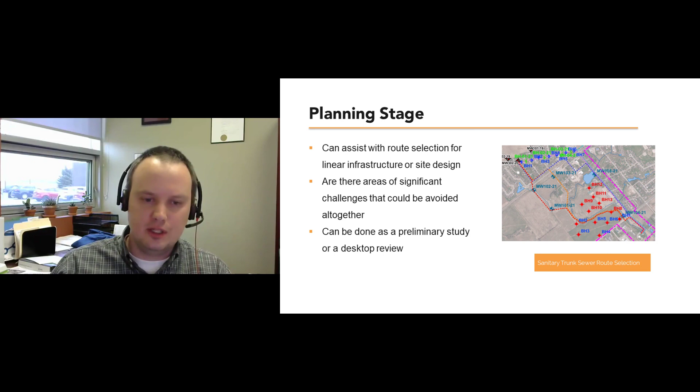Obviously, there's other factors at play with that in addition to the soils, but yeah. So these can be done kind of as a preliminary, something like that, where we're just doing a limited number of holes or just even a purely desktop review study.

During the design stage of a project, then typically we would be filling in the gaps from a preliminary study and really nailing down what all the conditions are on a site, whether there's unsuitable soils that need special design, whether you have groundwater, bedrock, whatever the case may be on the site.

So we're typically drilling boreholes at a set interval or set spacing for the project, whether it's a building or a road reconstruction or whatever the case may be, to get a good picture of the conditions.

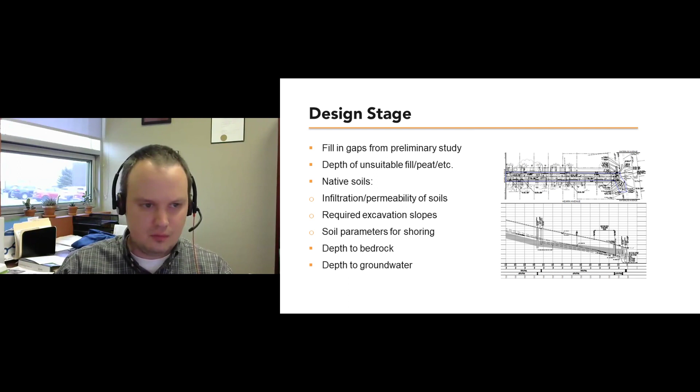And then at the construction stage of the project, really the contractors are looking at the geotechnical report to see what sort of equipment they need and what sort of production they can expect based on the soil conditions.

The type of soils on a site will have a big impact on the workability. If they're going to be impacted by weather, on kind of a silt and clay site, you may be shut down for 2-3 days every time you get a good rain, as opposed to a sand and gravel site where that water is just going to infiltrate away and you're going to be up and running as soon as the rain stops. So certainly has a big impact on that.

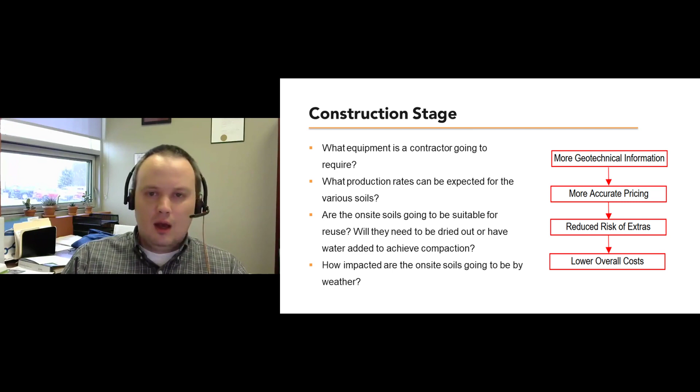And what are the key kind of elements in a typical report? Generally, most reports are structured fairly similarly, where you're going to have an introduction talking about the project, a discussion on kind of what was done for the investigation, and then a discussion on the soil, the groundwater, the bedrock, whatever the conditions that were found.

And then following that, you're going to have your recommendations on what needs to be done to have a successful project. So whether that's trenching recommendations or bearing capacity for buildings or bridges or structures or whatever the case may be, that's going to be kind of in that main discussion and recommendation section.

And then typically in the appendix, you'll have figures of the site plan, location plans, borehole logs, and any lab testing results that were completed as part of the project.

So moving on to borehole logs, every consultant uses a different kind of template borehole log. So they all look a little bit different. Some have color, some are black and white. The location of the information may be in different places, but the basics of a borehole log are generally going to be pretty consistent, the basic information that you can find.

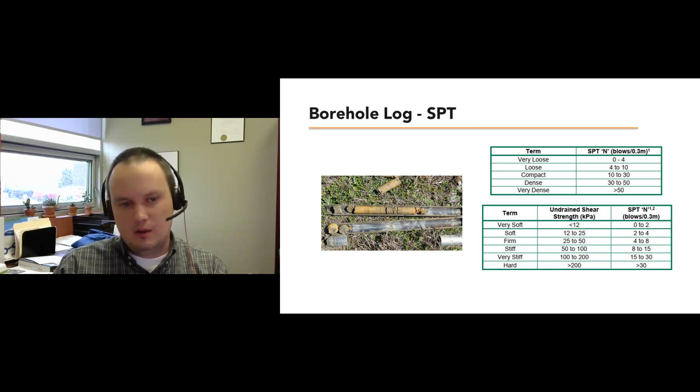So what the pocket penetrometer is, it's kind of a quicker small handheld probe that you just stick into the soil, and it gives an approximation of the shear strength. The field vane is a bit more intensive, so you push a 4-bladed device into the ground, and then you turn it to get the initial strength, and then you wait, and then you turn it again to get the remolded strength. That difference between the initial and the remolded gives us the sensitivity of the soils. A more sensitive clay is going to have a much wider spread between those two values, whereas something that is not that sensitive will have much closer values.

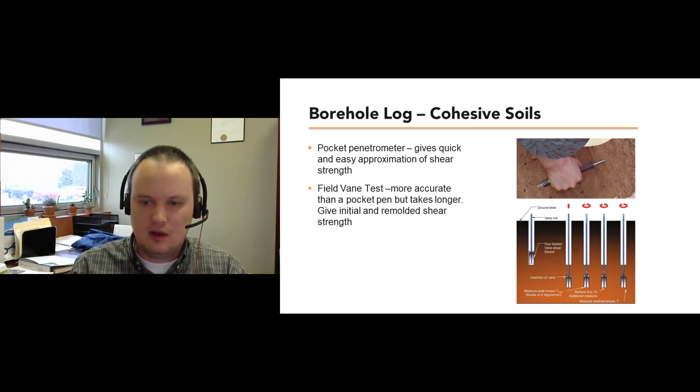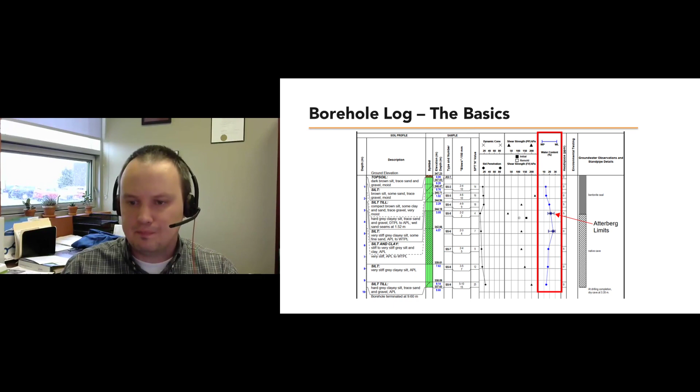So in this particular case where you have a water level 2 meters below ground surface in September, if you were going to start the project in April, odds are that water level is going to be a little bit higher at least. So definitely something to keep in mind, that just because your borehole log says your 2 meter deep excavation is not going to be in the water, that may not be the case at a different time of the year.

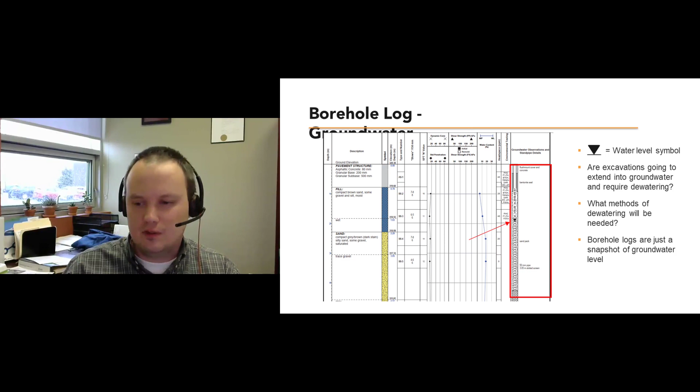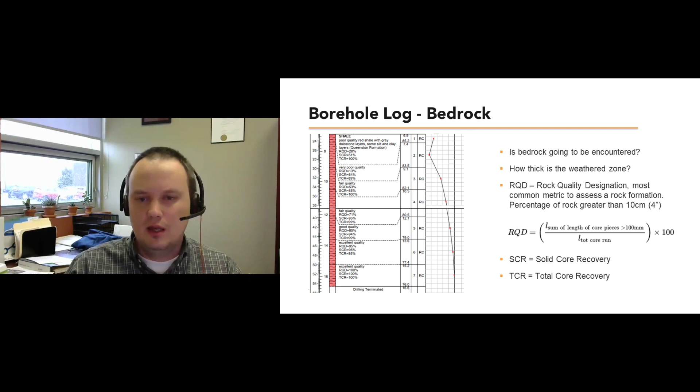So the next log I have here is a log showing some bedrock cores. So obviously bedrock is going to have a big impact on your constructability, if you're going to be dealing with that. So some big critical things to note on that is how thick your weathered zone is. On this particular log, you can see that the top, what I've shown in the box there, is poor to very poor quality bedrock, and below that is fair to good, excellent quality, progressively getting better quality as we go down.

As well, something to note in this one, the bedrock is described as red shale with gray dolostone layers. So those dolostone layers are going to be a lot harder within that shale. So the shale in this case may be something that is able to be broken up quite easily with a rock breaker on an excavator, but the dolostone layers may significantly slow them down depending on the frequency, the thickness and the hardness of those.

The values that are typically provided, the most common one is the rock quality designation, so your RQD, and that's what we use to base the very poor, fair, good, excellent quality rock. And so really it's just a good indication of what the strength of that rock is. It's the percentage of pieces that are greater than 4 inches long divided by the total length of the rock. So in this case, the one shown in the box, the RQD is 53. So just over half is coming up as bigger pieces.

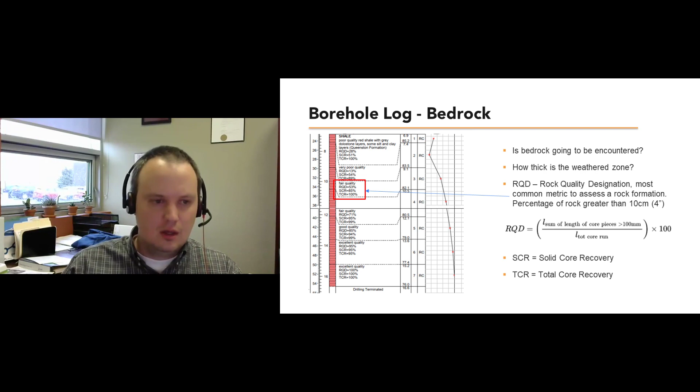But now, if you're installing a new manhole, you're not going to want to set that manhole right in that peat layer, because it's not going to provide support. You're going to have settlement after construction and a wonky manhole within a couple of years. So you're probably going to need to dig down deeper and replace it with some more granular bedding or something to deal with that peat.

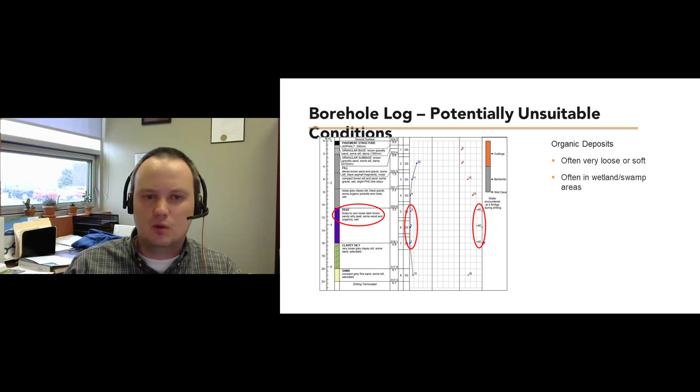As well, 2 more examples I have here. On the left was a project where we encountered an old landfill that the municipality wasn't aware was there. So you can see the column on the right of that log shows the N values. They're 3, 2, 2, 3, 6. And the descriptions of some of the material there: clay, plastic, metal, glass, wood, brick. Again, something that's not going to be suitable to support really much of anything without movement after construction.

On the right side, that is a log that was taken right on the lakefront of Lake Ontario. So back in the day, loose lake fill to get more land on the waterfront, using whatever they could find, slag, brick fragments, and obviously that material would have been placed underwater with very little compaction and isn't going to be suitable to support really much of anything. The N values there are 7, 5, 2, 2, 0, 2. So very low strength, something that is going to need to be designed around.

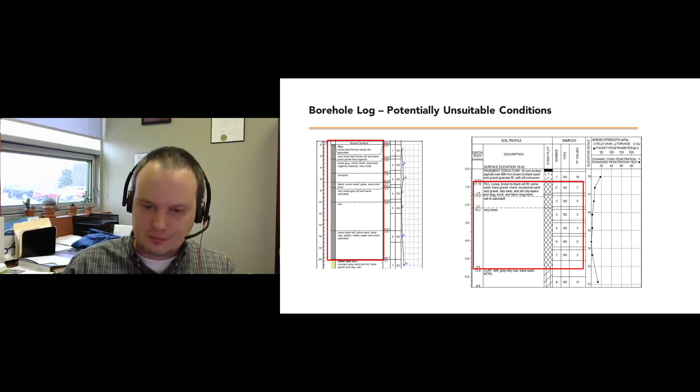So next, we'll talk about how to scope an investigation. The answer is it all depends on the project and what you need to do. A lot of that comes from what you're expecting the conditions to be and what the complexity of the project is. Are you going to have bedrock, high groundwater, or are you expecting crappy fill or peat or something like that? And as well, what is the variability of the natural geology in that area?

On the right, these are two pictures of surficial geology mapping. The two areas are only about 80 or 100 kilometers apart, but on the bottom, the surficial geology in the Niagara region is very consistent, generally a clay material, whereas the other one, in the Drumbo area, is very variable, where you may need a tighter frequency of borehole spacing to make sure you're not missing a pocket of sand and gravel that might be saturated and would cause significant problems with dewatering during construction.

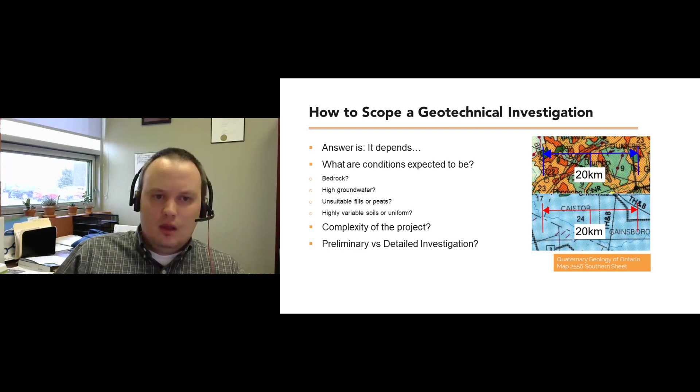So some key things to consider when asking for a proposal. What is the purpose of the investigation? Are you looking to get preliminary or detailed design? If it is detailed, you really need to provide your geotech engineer as much design information as you have, so they can make sure their boreholes are deep enough and their spacing is correct. And you really need a clear definition of the scope if you're getting multiple quotes so that you can compare apples to apples.

Recently, we had a project and the client came back and said we were twice the price of somebody else. Talking to them a bit further, the other consultant hadn't put in any monitoring wells. Well, I knew that the project was in a sand and gravel area, groundwater was very shallow, and we had a 6-meter deep sewer that was going to need significant dewatering. So without monitoring wells, it wasn't going to be a sufficient program.

Some other considerations to take into account. One thing right now in Ontario, at least, is excess soils. We have a new regulation for the movement of any excess soil from a project site. So on almost every project, we have an environmental engineer involved, and we're doing a soil characterization report to classify that soil and recommend where it can go.

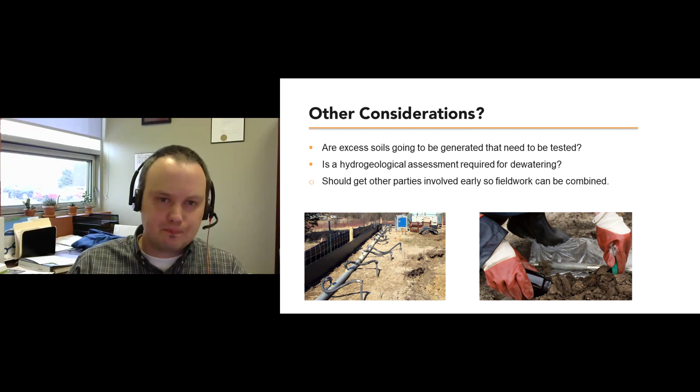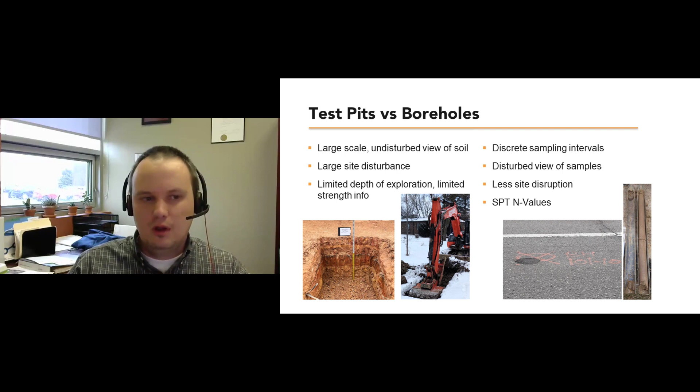Something else, I get a lot of clients asking, can we just dig some test pits instead of doing boreholes? Test pits can be good. They give you a very good view of the undisturbed soils, but they have a very limited depth of exploration, and they make a mess. So boreholes can be a lot cleaner. We can get a lot deeper, and we get a lot more information about the strength of the soils from a borehole.

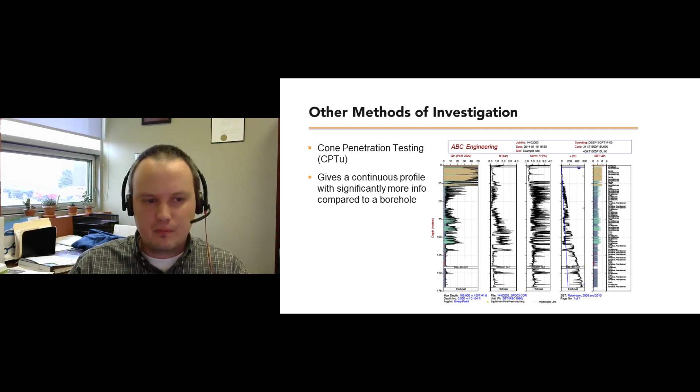Other methods of investigation: cone penetration testing, CPTU testing. It does give you a continuous profile with a lot more soil parameter information compared to a borehole, typically used on higher complexity projects just because there obviously is an increase in cost with that. And then after the field work, obviously lab testing is typically done with any sort of investigation. So

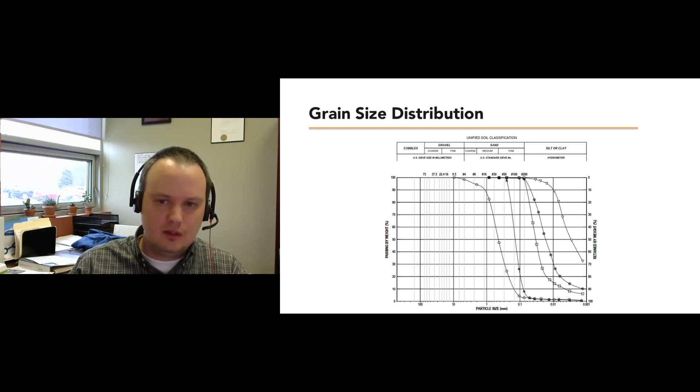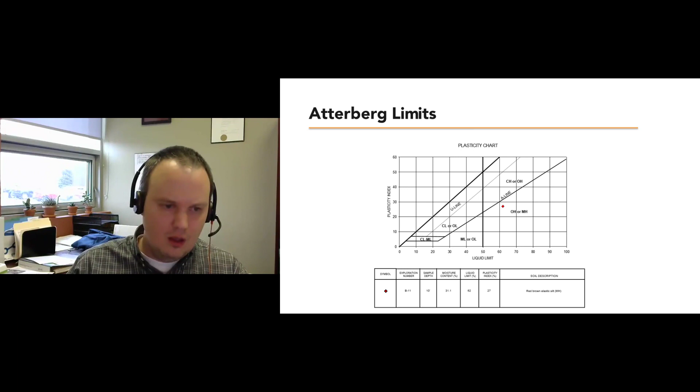So in conclusion, the geotech report is important. You should be reading it and trying to understand it. If there's anything you aren't understanding in it, I'd encourage you to talk to your geotech engineer, ask questions about it, and figure out what they are trying to tell you, so that you're not missing something.

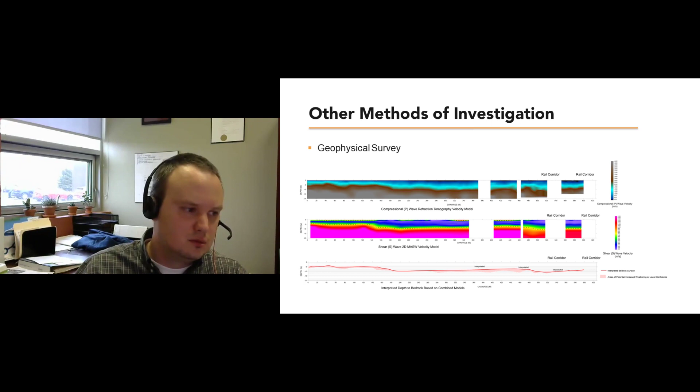Okay, that's great. I was just looking ahead here, and there are a lot of questions. We are definitely not going to get through them all. So maybe you can answer the questions as succinctly as possible. Okay.

Is ground penetrating radar used for road structure investigation, for delineating asphalt, base, subgrade, etc.? Yeah, we've worked on projects like that. Again, it's something that you have to calibrate, but it's good for seeing areas where you may have a small pocket with insufficient granular base or subbase, or a really weak subgrade area. So it's a good way to pick locations where you may need a borehole, because there may be problems in that area.

Okay, when would it be typical for a municipality to require a geotechnical report for a development on private property? We see different things with different municipalities. Most of the municipalities that we work in require it for a site plan application for a new development, as well as a draft plan application for new subdivisions. It really depends on the size of the project. Typically anything of a larger scale is obviously going to require it just for design itself, but the municipality will also be asking for it.